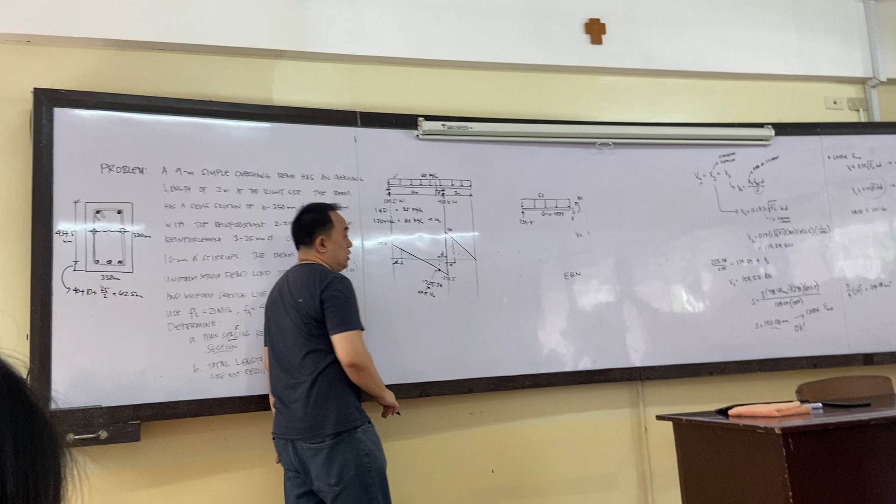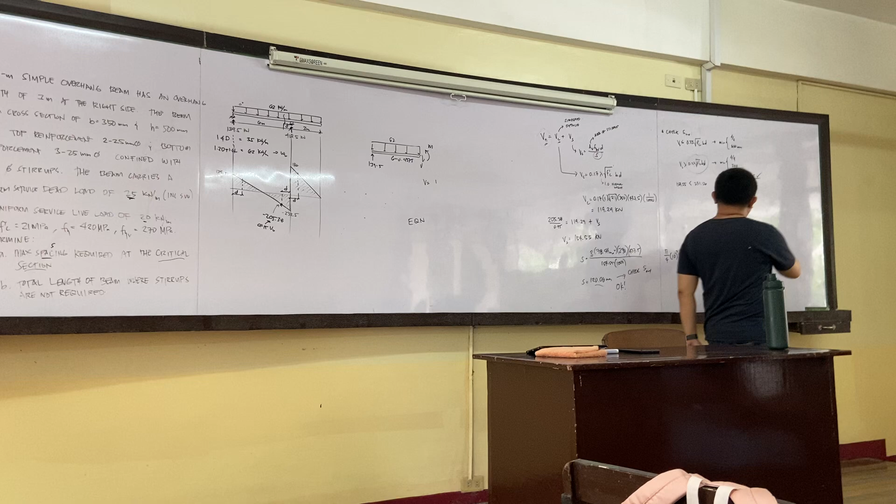Technically speaking, or theoretically speaking, you don't have to provide stirrup. But still, you will need some sort of stirrup para ma-hook niyo ang inyong main bar. So the value for that is supposedly d/2 or 600, magiging siya maximum na rin. But due to seismic provisions, naa say mga set na limitations. But we will not touch the seismic limitations now.

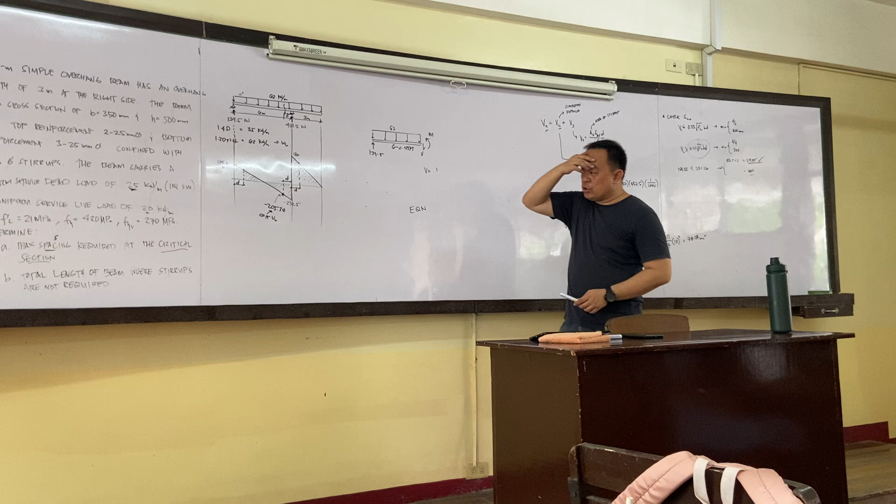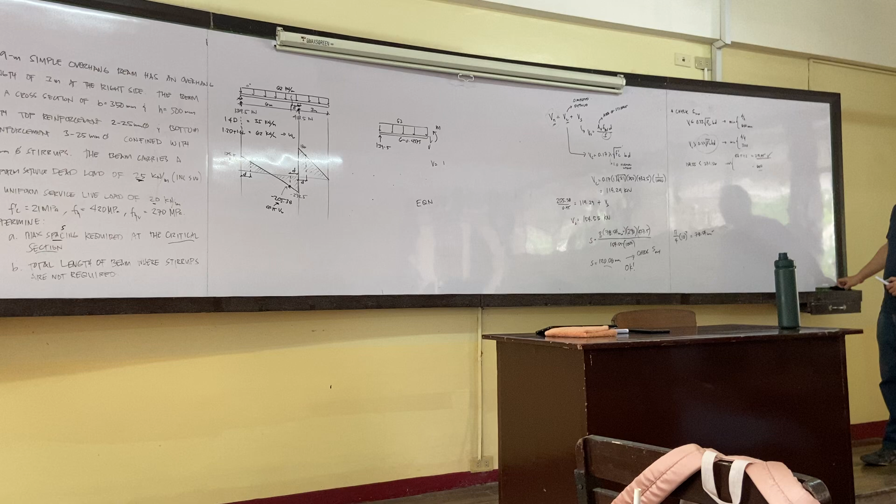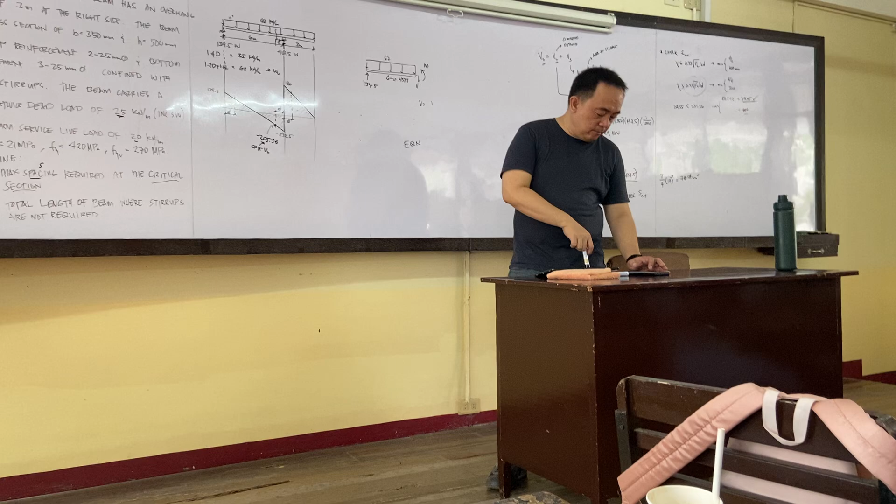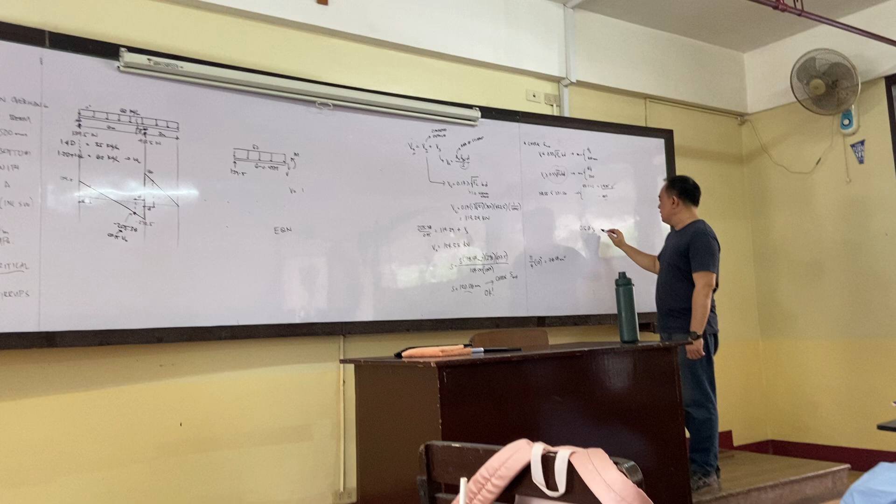So we're going to solve this based on the principles of shear. Okay? So how do we test if there's no need or there is a need for your stirrup? Okay, so to do that, look at the pictures. Okay, it's there on table 409.6.3.1, cases in which Av minimum is not required: if Vu is less than 0.5 phi Vc.

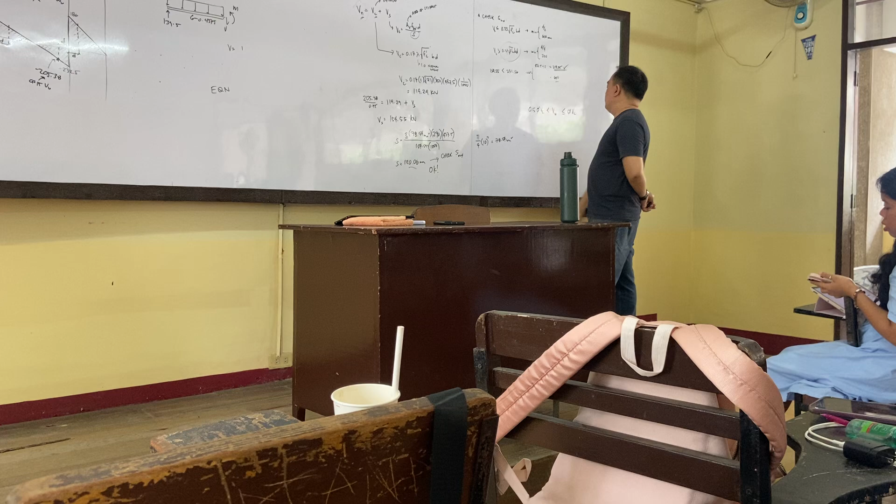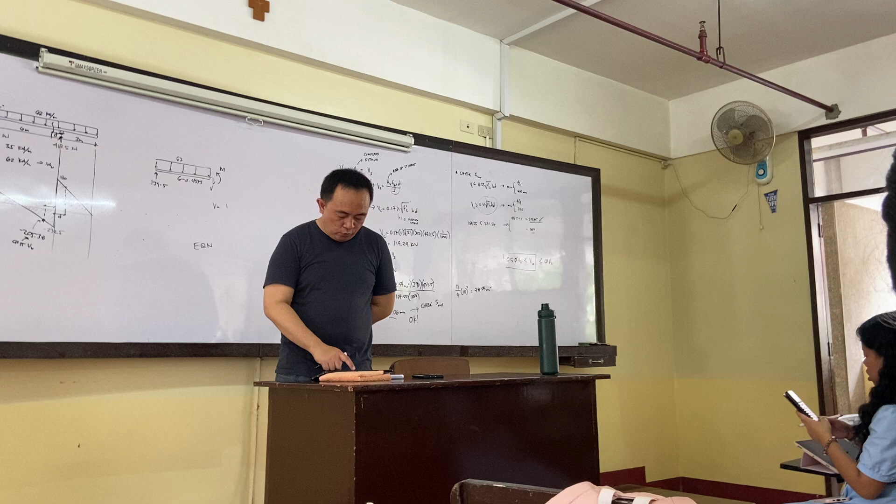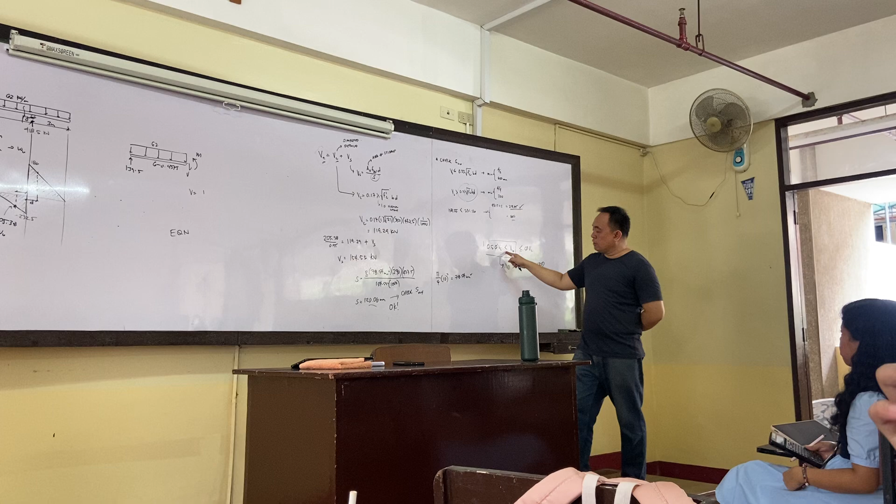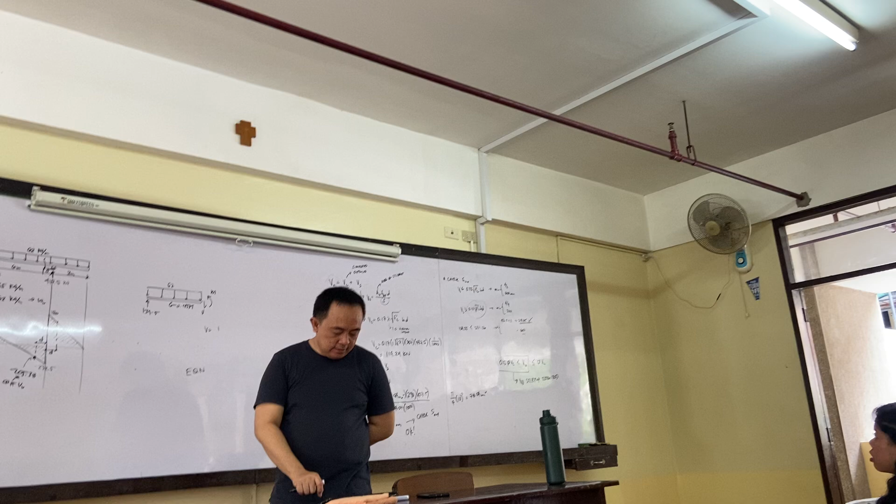And then of course equal Vc. Okay, so I think we only need this one to determine if there's no need to check and to solve for your stirrup. Let me just confirm. So if Vu is less than 1/2 of your phi Vc, this one is no stirrups required. Okay. If Vu is less than, no stirrups required. So, asa man na siya na part sa inyong stirrup? Okay?

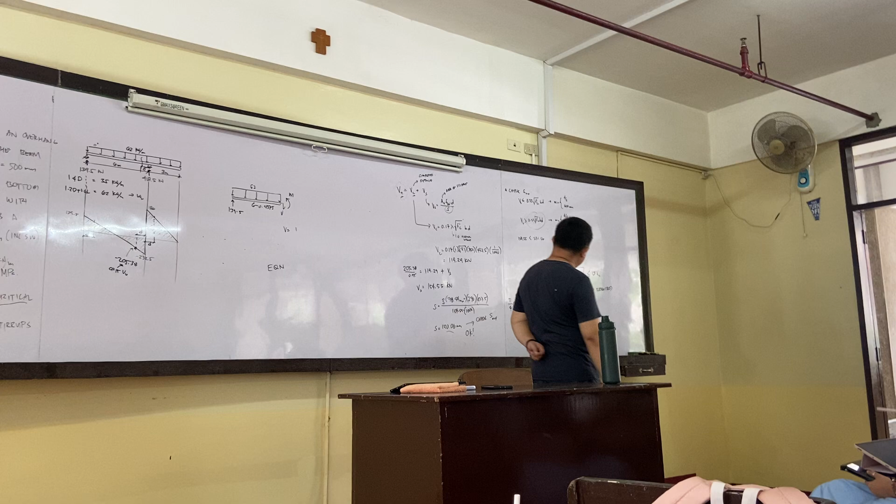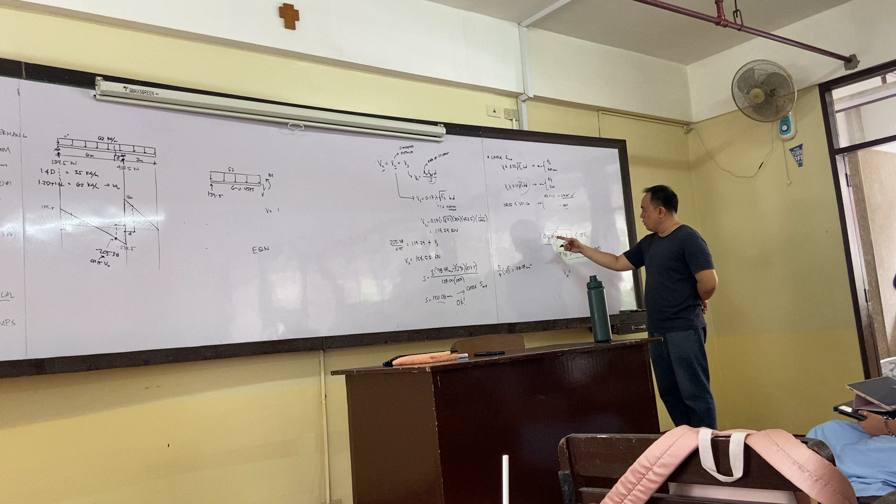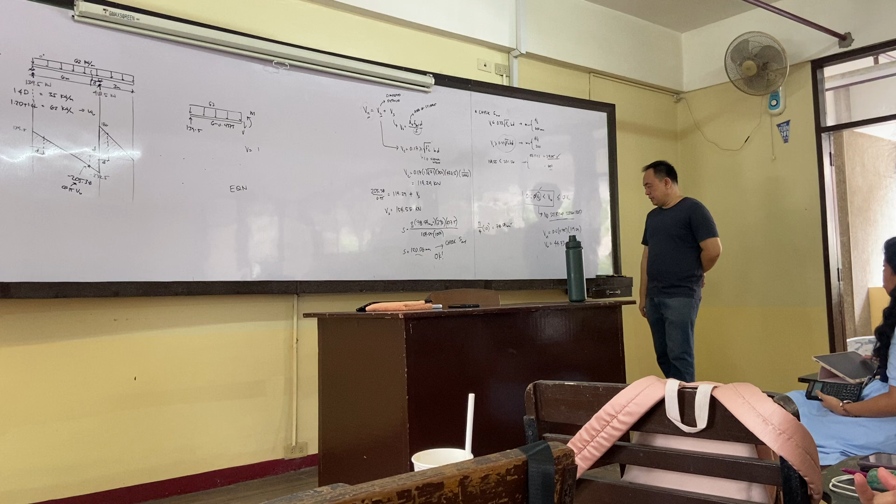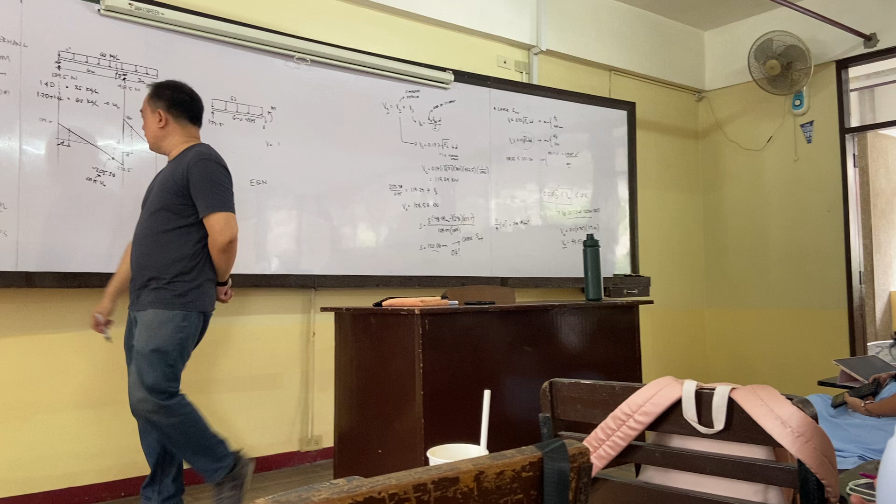So, let's start. Our Vu, we have this already. So for this to be satisfied, you will have Vu equals 0.5 times 0.75 times 119.28. What is this? 44.73. Okay. So this one, Vu, you're going to look back again to your shear diagram. So asa man na siya, 44.73? It should be somewhere here. And then it should be this length here, or this length. Because this is our L1, this one is our L2. So L is the length where no stirrups are required.

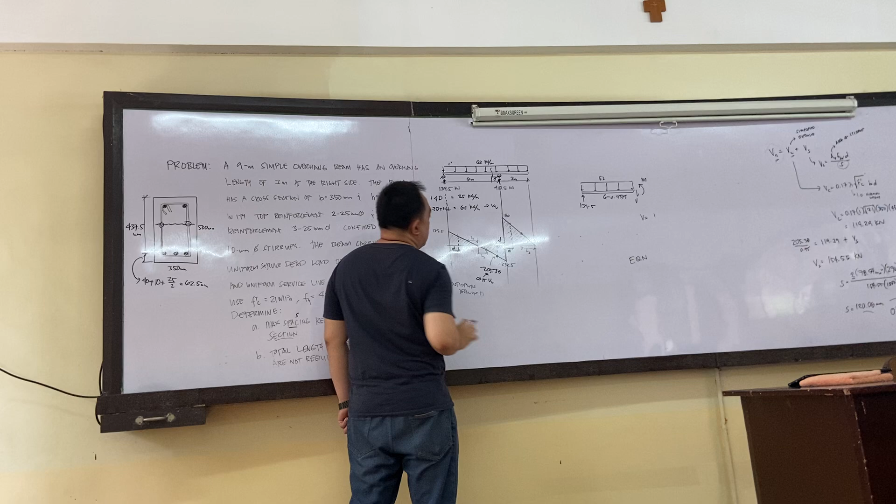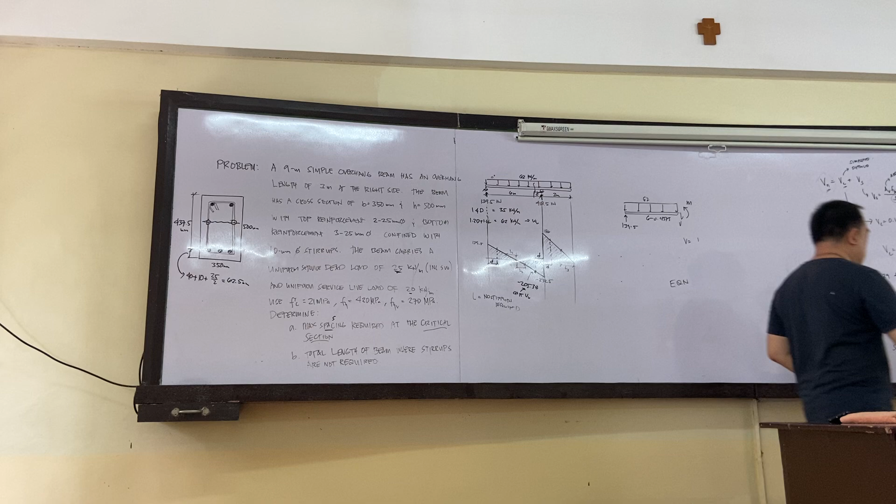So we're going to get the x values sa inyong shear diagram. And then it says here the total length. So you're going to add L1, L2, and L3. Okay? So how do we extract L1? You can use similar triangles or equation. Pwede na equation, in terms of x. And then V is 44.73. Sum of forces vertical: V plus 62 times x minus 139.5 equals 0, with V equal to 44.73.

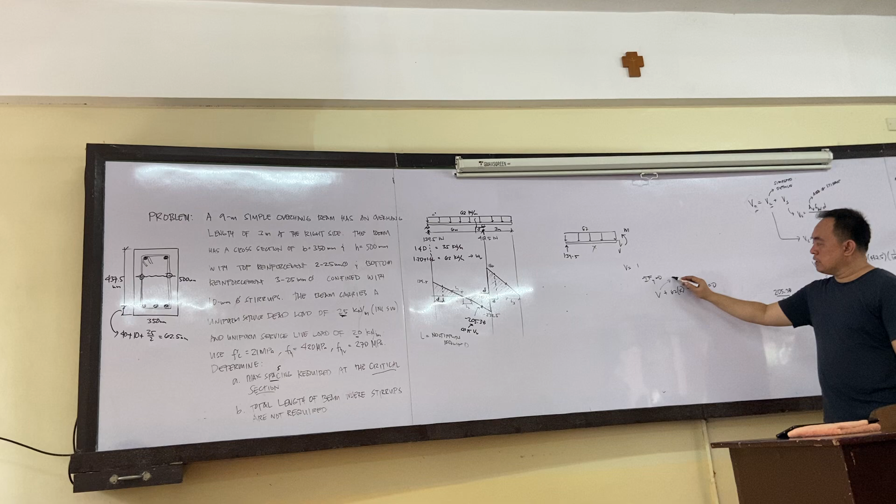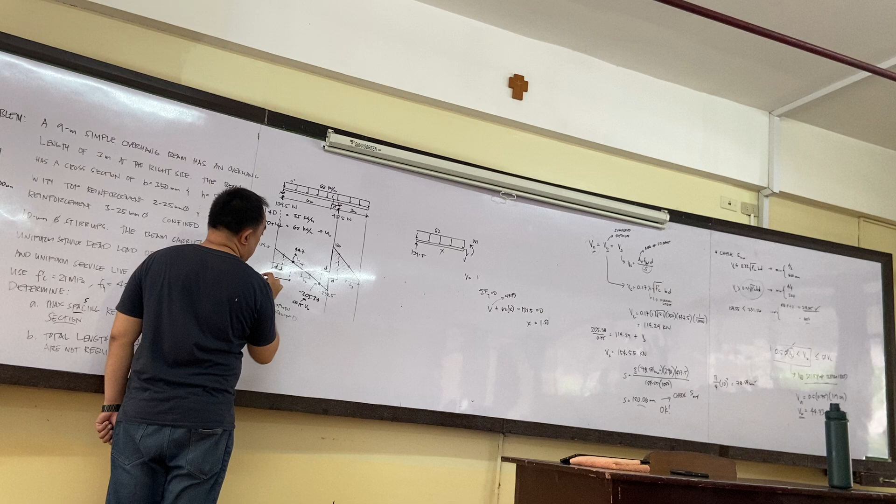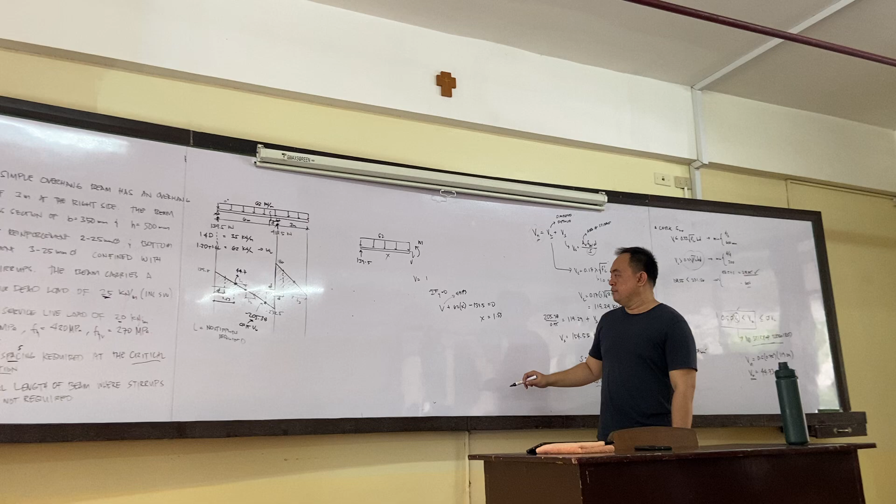Ma-solve nato siya: 1.53. So, we're looking for this one. The solved x is 1.53. At shear equals 0, x is 2.25. So let's try to verify that using our similar triangles later. So 2.25 minus 1.53 is 0.72. That's the same if you use similar triangles.

How about this one? Somewhere here is your negative 44.73. How do you solve that? Not from the drawing, unless you scaled the drawing. It's not at the middle; it would only be at the middle if the reactions were equal. How much is this? If this entire thing here is 2.25, what remains? 6 minus 2.25, 3.75.

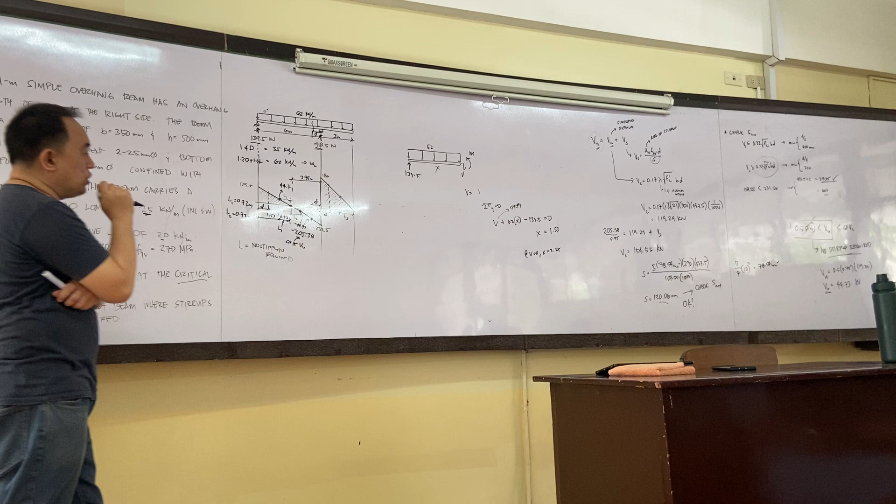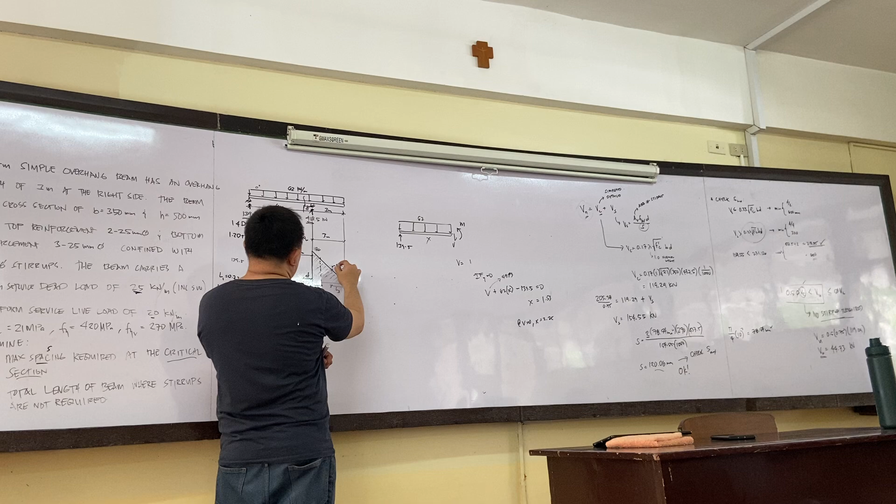Can we use similar triangles? Pareha lang sila, same as the equation. So for similar triangles, this is 0.72. That's L1, 0.72. You can use an equation or similar triangles. And then for L2, we still have 0.72 meters by similar triangle. It just happens that they're the same. And then for L3, we have 3 meters. And then this one here is 44.73.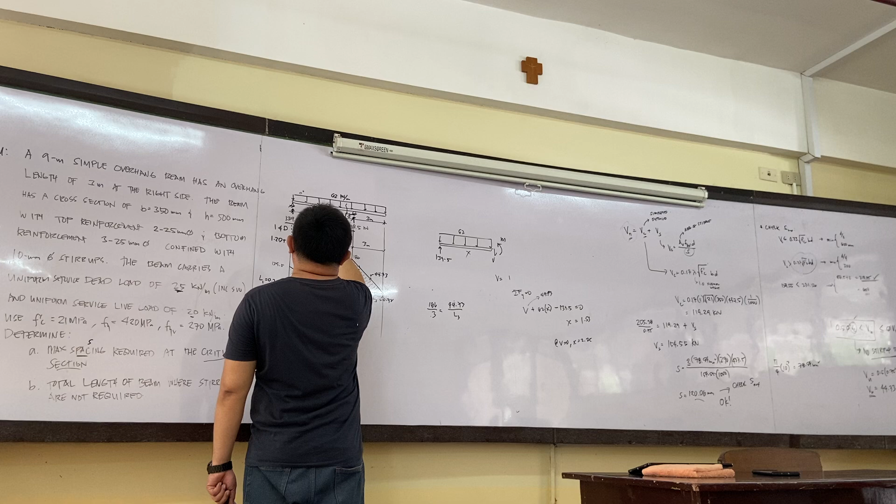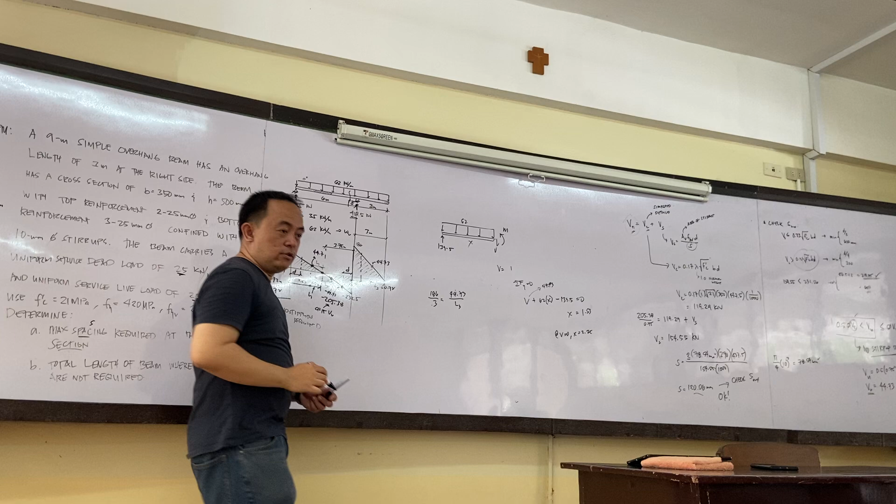So, this one here is no stirrups required. Inipod na side 0.72 na. So, daras kumuhi lapit. Mana sa inyo mga no stirrups required. So, portions in, of course, obviously, dapat din inagin sa stirrup nung ilapok niya yung shear. But as you go towards the end, magdamay ang shear, so no need na for that.

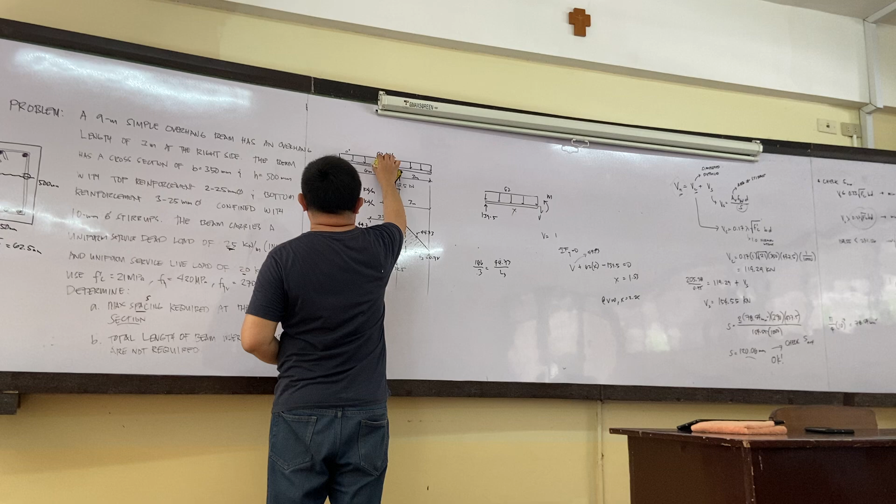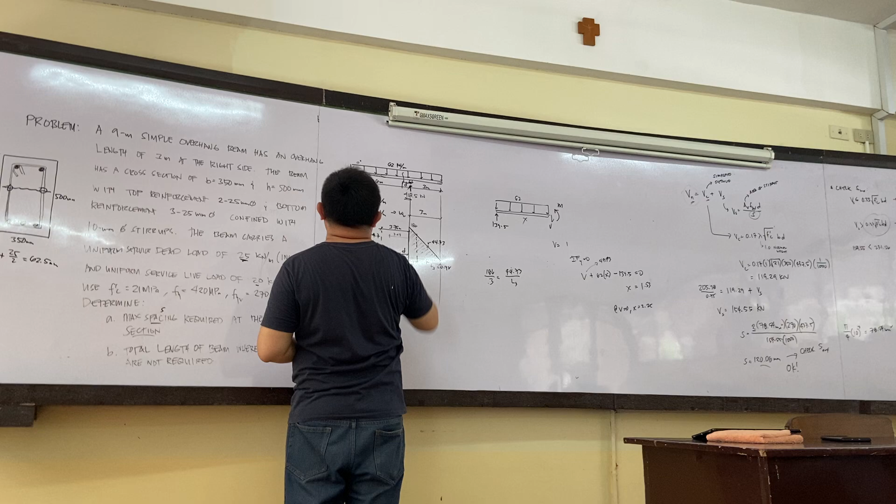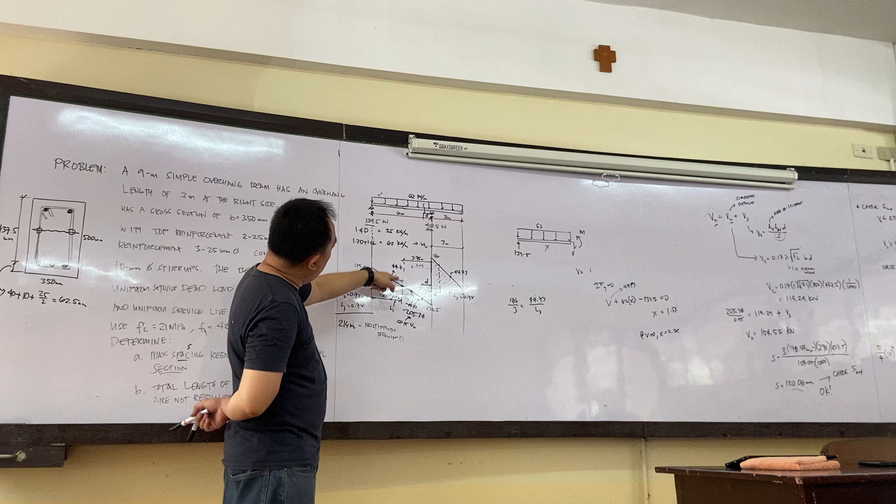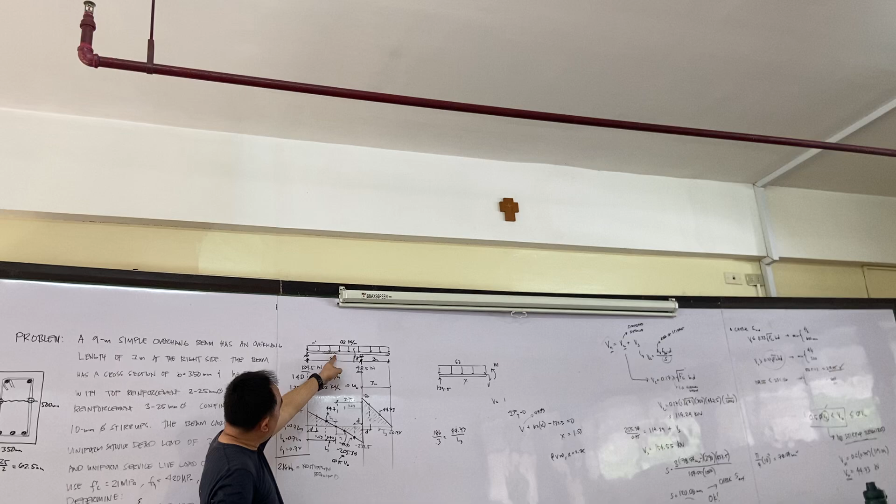No stirrups required. But of course, tangan din natin niya siya ang stirrup. L1 to L2 siya. L1 plus 0.72 plus 0.72 pa rin. Di lang scale na ito. Diagram na. Should be somewhere here. Okay. So niya nakagamit ang shear diagram sa inyong kinabuhi. Questions?

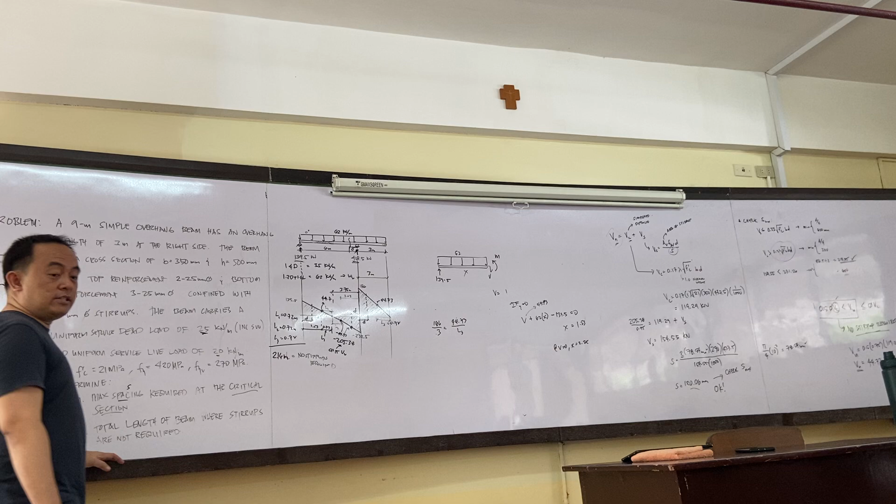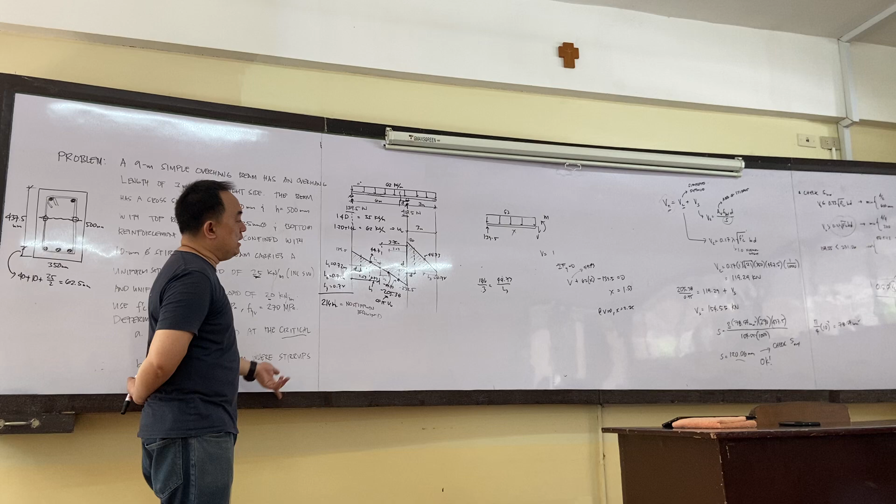Ang flexural stress, kuha din mag-shear diagram, ay ka makabuhat ng moment diagram. Kung na ang standard procedure. One standard procedure sa E16, statics o strength of materials. The standard procedure is shear diagram ka, ay ka mag-moment. Although kung expert kayo, pwede ka sa moment. Sa C15, diretso na ka ang moment diagram. Okay?